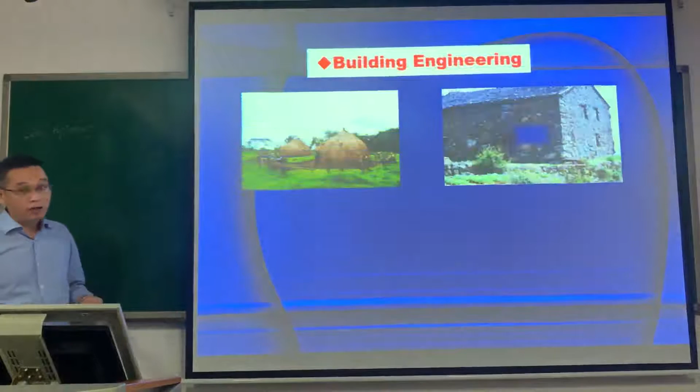Class, at first we need to review what we have learned last time. Last class, we learned two questions. The first one, we learned what civil engineering is. We saw a lot of pictures about buildings, building engineering, and the development of building engineering. Then we had something about the bridge.

Bridge engineering, road engineering, and hydraulic engineering all belong to civil engineering. From these kinds of structures, we can find many different civil engineering materials. In these materials, we find aggregates, cement, concrete, steel, and asphalt.

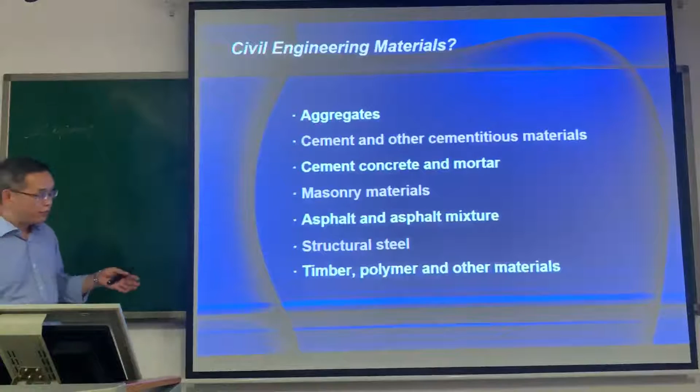For these civil engineering materials, the first one we learned about is cement. Cement is the most widely used material in civil engineering, because if we want to build a house, or construct a road, a bridge, or a dam, we need to use this material. This is cement, the most widely used in civil engineering.

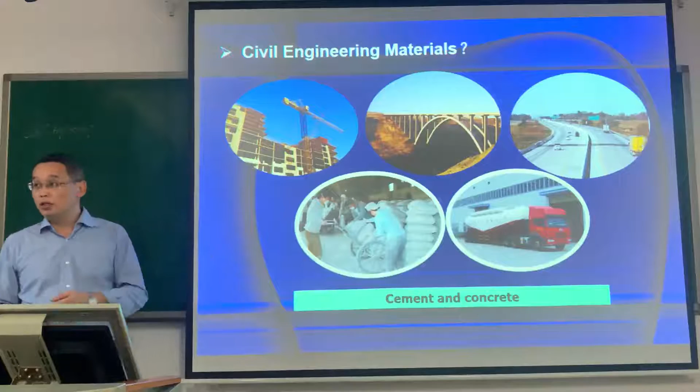The second is the aggregate. Aggregate may consist of two kinds. The first one comes from nature, so we call it natural aggregate. The second one is man-made aggregate. We can also divide aggregate into two kinds: the first is coarse aggregate, and this one belongs to fine aggregate. The function of these two kinds of aggregate is different.

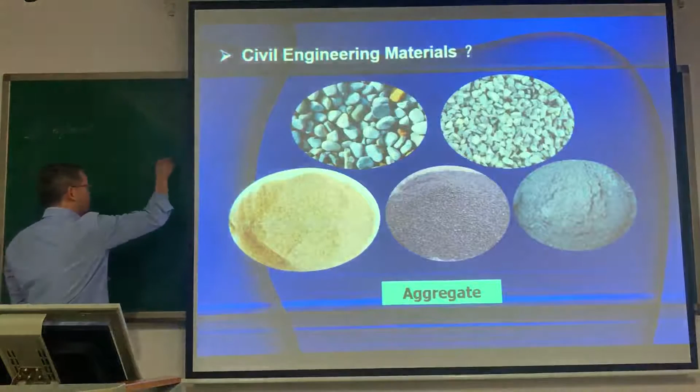The coarse aggregate is the skeleton, the skeleton or frame of the concrete. And the fine aggregate is for the density of the concrete.

The amount of aggregate is the biggest. We use cement concrete for houses and asphalt concrete for roads. In cement concrete or asphalt concrete, the percentage, dosage, or content of aggregate is the biggest. In cement concrete, maybe 80 or 90% of the material is aggregate. So the amount of aggregate is the biggest.

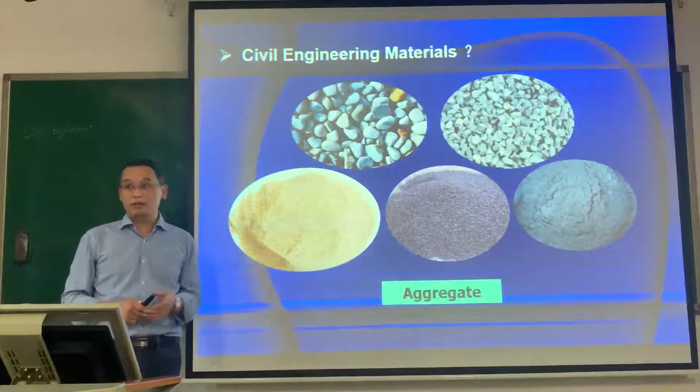Then for steel, it was invented only about 200 years ago, but it is very important for the size, the performance, and the lifespan of the structure. In modern times, it is always used with cement concrete, as in reinforced concrete.

Then there is asphalt and asphalt concrete. The application of asphalt and asphalt concrete is widening now. We can use asphalt concrete to construct roads, and we can use asphalt for the waterproofing of structures or roads. Asphalt has two kinds of state. The first one is the solid one.

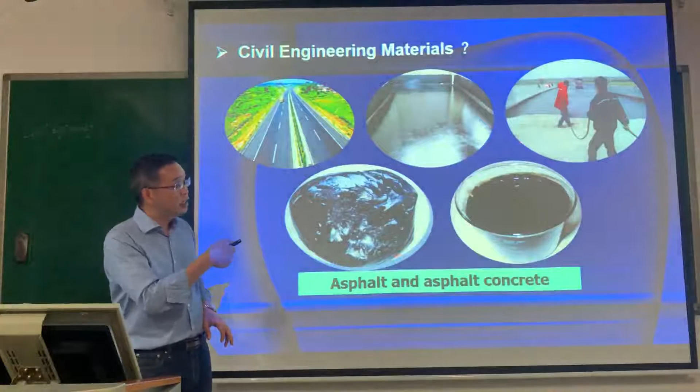And this is the liquid one. Liquid asphalt is mainly for the waterproofing of structures, and solid asphalt is mainly for asphalt concrete for roads. So this is what we learned last time, two questions.

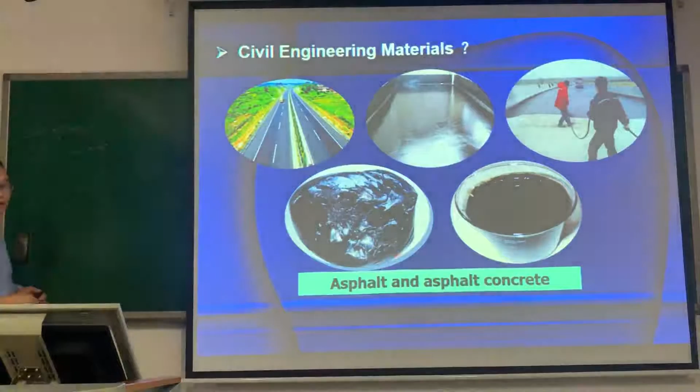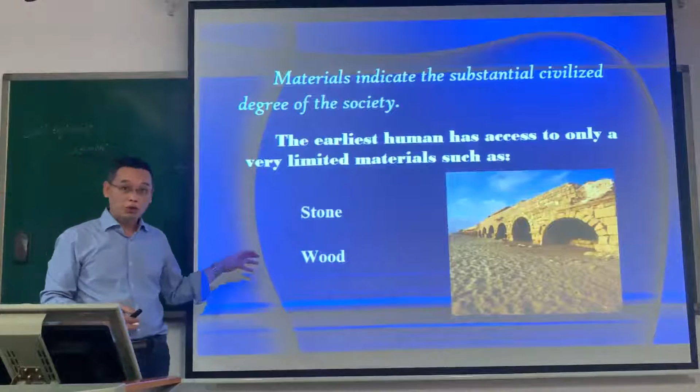Then we learned about the history of materials and how they developed. Stone and wood both belong to natural materials. In ancient times, if we wanted to build a house or construct a road, we needed to use these natural materials. Now we can use modern materials, including concrete and steel. The history of concrete and steel is only about 200 years.

And for the natural materials such as the stone, the wood, and then for some man-made materials such as the bricks, the history of the bricks is about 2,000 years. And for the concrete and steel, it's just 200 years.

And we can consider that the application of these kinds of materials will be very, very long. Maybe several hundred years later, maybe 2,000 years later, we all need to use these kinds of materials for the civil engineering structures. Okay, and the glass and the fiber in the modern era, these kinds of materials make the structure more strengthened, more comfortable, and the life of the structure is also...

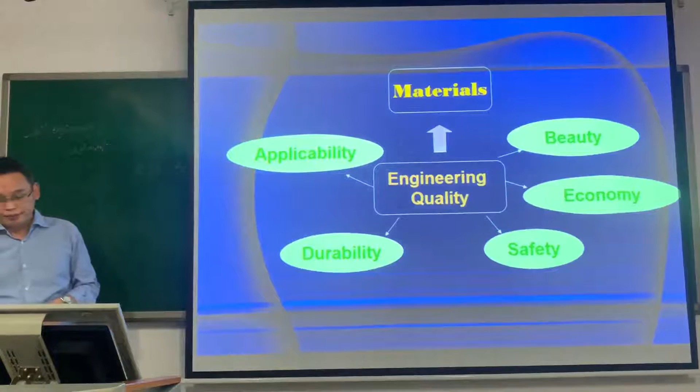If a kind of material is popular for us, it is most important that this kind of material can be used conveniently. So this is about the applicability. So there are some new materials, new technologies for them. And for the definition and classification, we have mentioned last time.

We can divide them by the chemical compounds, by the function, and by the location. If by the chemical compound, we can divide the materials into three types. The first one is inorganic. The second one is organic. The third one is composite.

What kinds of materials belong to the inorganic materials? Such as the glass, the steel, cement, concrete, rocks, also the aggregates, bricks, yes. They all belong to the inorganic materials.

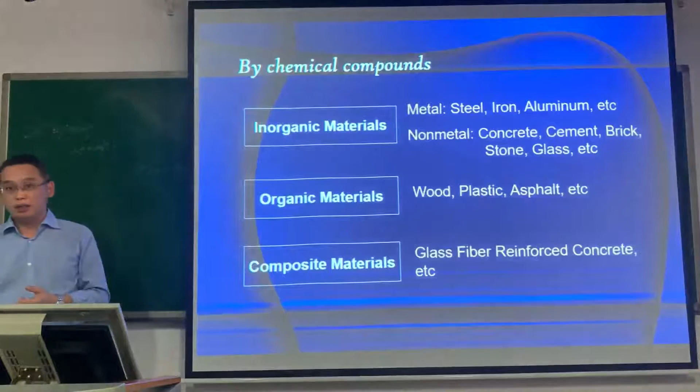And what kind of materials belong to the organic materials? Such as the wood, asphalt, rubber, plastic, yes, plastic. And then the composite materials consist of two kinds of materials. So this is the classification of the materials by the chemical compounds. And then we can get the classification of the materials by function.

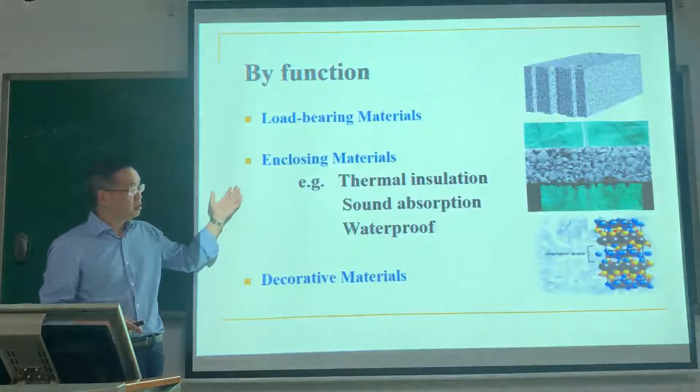The first one is the load bearing materials. In our classroom, the beam, the column, the slab, the floor, they all belong to the load bearing materials. And in this class, there are some enclosing materials, also decorative materials, such as the tile, the painting, they all belong to the decorative materials, also enclosing materials. And by the location, there are different kinds of materials we can divide.

So, for the history and the trends, we have just remembered. But the most important thing I want to emphasize is about the steel and the concrete. We have just learned that the history of the steel and the concrete is very short, just 200 years. And in the future, we need to use these kinds of materials for a long time.

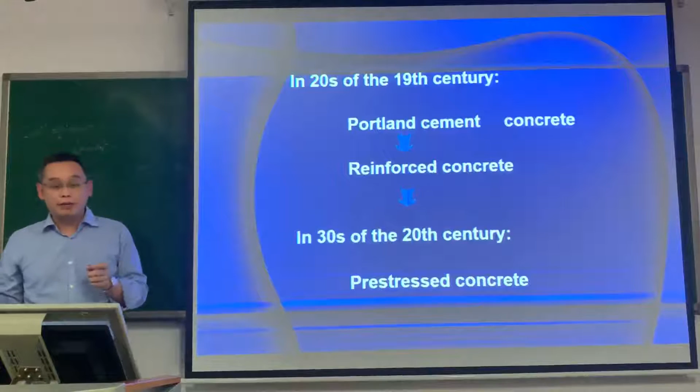And for the trend, what we need in our future, the materials need to develop like this trend. The first one, most important, is high performance, including the strength, the life, the durability, and then multifunction, environmental protection, and energy saving. So this is the trend we need to emphasize in the future.

So from now on, we have found that there are three kinds of materials developed in our history. The first one is the man-made materials, just like the bricks. The second one is steel. The third one is the concrete, including the cement concrete, asphalt concrete, and so on.

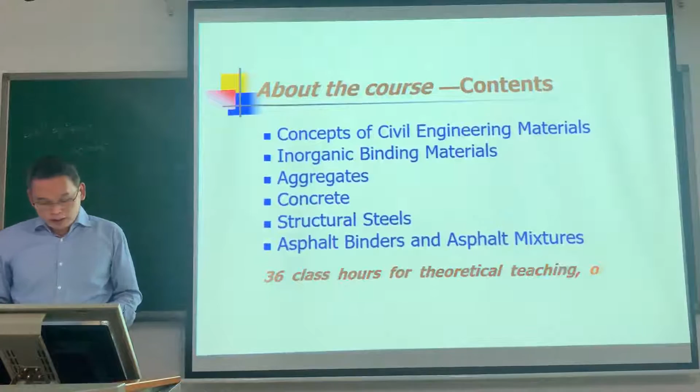So, what should we study? The most important are these three parts. The first one is about the properties of the materials. The second one is about the application of the materials. And then maybe we need to do something about the modification or the improvement of these kinds of materials.

We get to meet the raw materials, production, composition, structure, standards, tests, and so on. And in the application, we get the specifications, such as for the tests, the materials, the construction. There are a lot of specifications.

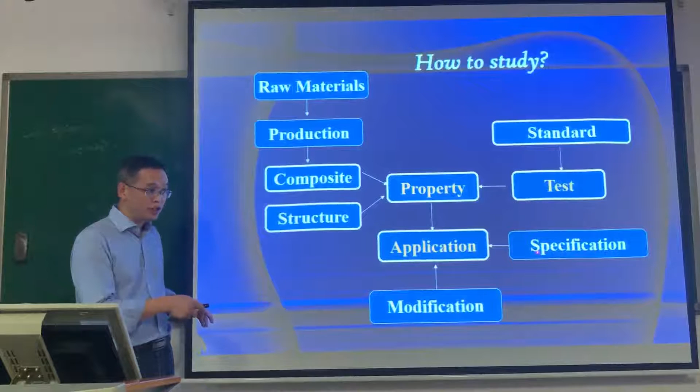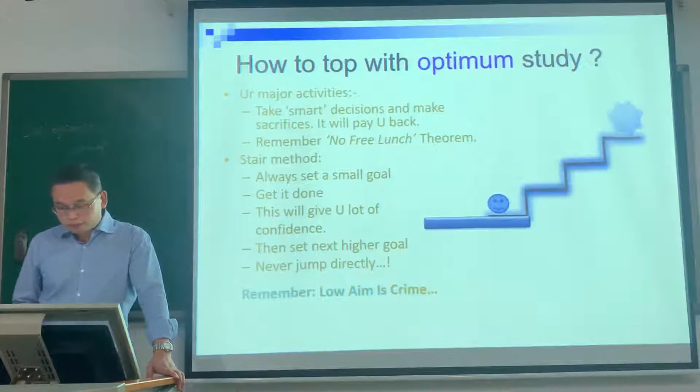Okay, maybe we can get a score at the final. So the most important thing I should emphasize is about the class. Everyone needs to enter the class on time, and then listen, and take part in some discussion. Okay, this is about the introduction of our course.

And then we'll move on to chapter 2. In this chapter, we are studying a lot of concepts about civil engineering materials. It is suitable for the aggregate, also for the cement, also for the asphalt. So these kinds of concepts are all the basic ones.

So in these concepts, the first one we need to know is the physical properties. After we learn the physical properties, we need to study the mechanical properties. In the physical properties, there are several different concepts we need to study. The first one is about the density.

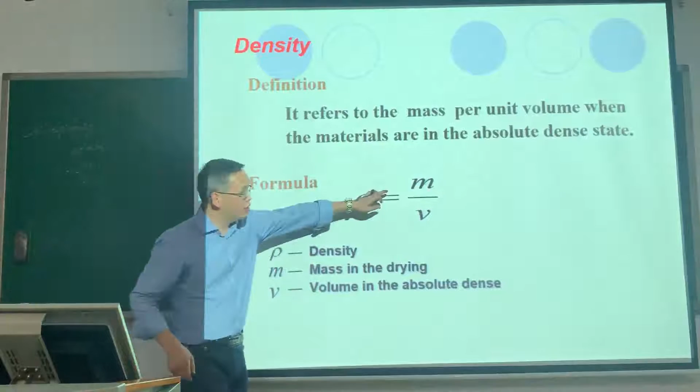So the first one is about density. The formula for density is very simple. For the density of materials, the formula is just like this. It refers to the mass per unit volume.

Per unit volume, when the materials are in the, I need to emphasize this, the state is not the natural state. It must be the absolute dense state. Absolute dense state. Then we can get the density of this kind of material.

But we need to know, for most of the materials, including rock, aggregate, cement, concrete, are they in the absolute dense state? No. Just for example, the aggregate or the rock.

Is it in the absolute dense state? No, there are pores in it. Maybe we can't find it by our eyes, but the pores exist in it. So for this density, it must emphasize the absolute dense state. Absolute.

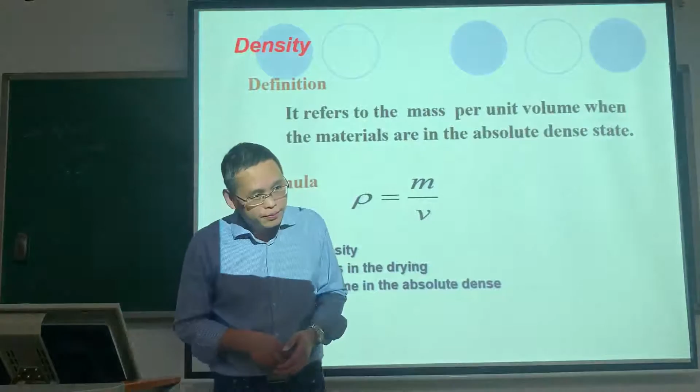If you say absolute density, what is an absolute density? You mean the absolute, there is no pores. Pore, P-O-R-E. Yeah, there is no pore in this kind of material.

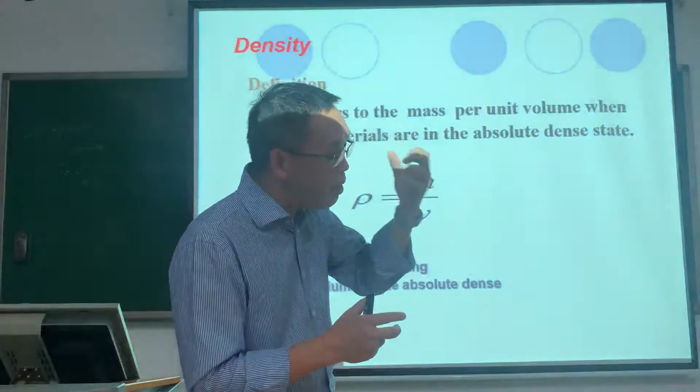We mentioned it, the absolute dense state. For example, this chalk. Is there any pores in it? Yes or no? Yes, there are a lot of pores in it.

If it is absolute dense state, it will be like a rock. What is it consist of? Powder, a lot of powder, and then compress it. But there are a lot of pores still in it. So for most of the materials, there are pores in it.

How about cement? What is cement, do you know something about it? First of all, you need to know what is cement. Cement is a kind of powder, and when we put the water into it, it will react, and after the reaction, the strength of the cement is developed. It will be hardened. So after hardening, is the hardened cement in absolute dense state? No, there are still a lot of cracks and pores.

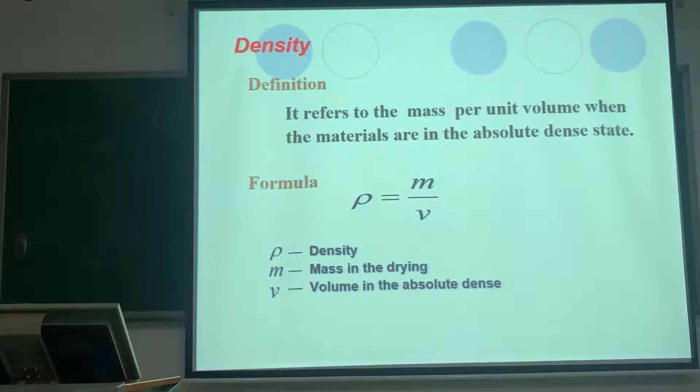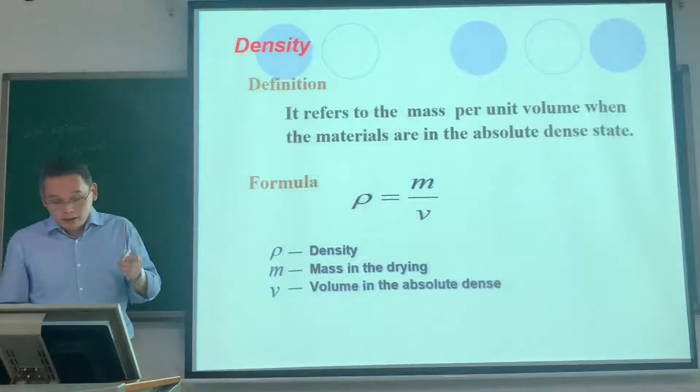So in the nature, most of them are not in the absolute state, especially for our construction materials. So this is the first one for the density. So the second one, if we want to get the absolute dense state, we need to grind it. For example, the chalk consists of powder, we need to grind it more and more finer.

But why do we need to grind it? We need to separate it, to get the pores out of it, and get the absolute dense state of the powder. So this is the first kind of density, we can call it the real density.

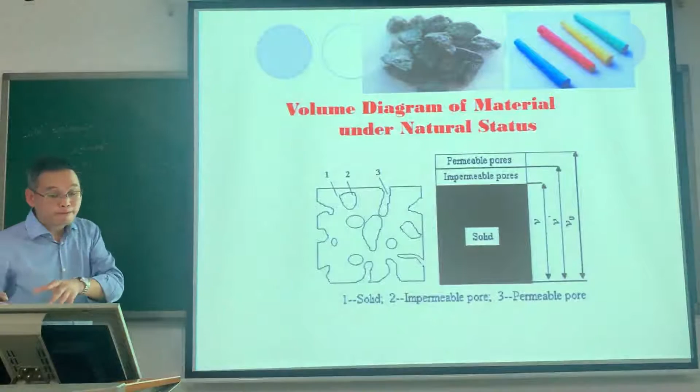If we want to know other kinds of density, we need to know this diagram. In this diagram, maybe this is in the natural state, the volume of a material. In the material, maybe the volume is divided into three parts. The first one is the solid, this is in the absolute dense state.

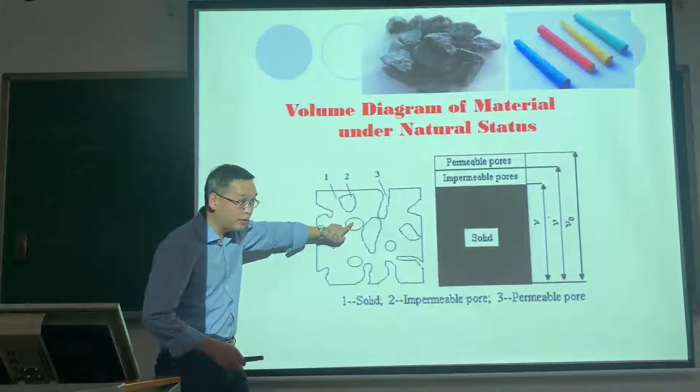However, besides the solid state, there are many pores, and this kind of pores can also be divided into two parts or two kinds. The first one is just like this one, they all belong to the pore, they are the pore: permeable pores. However, for this one, they belong to the impermeable pores. For the permeable pores, it means it contacts with the air. Can it contact with the air? Yes. But for the impermeable pores, it is inside the material.

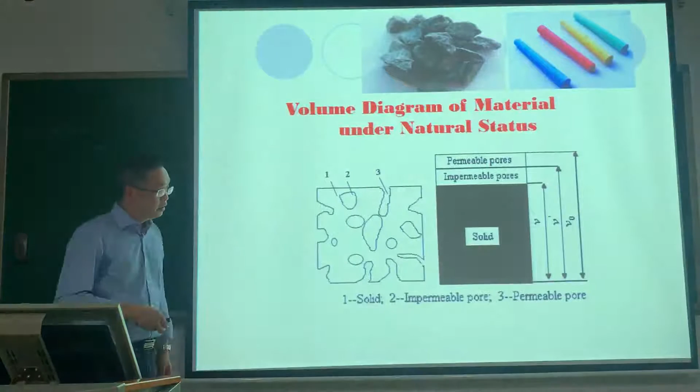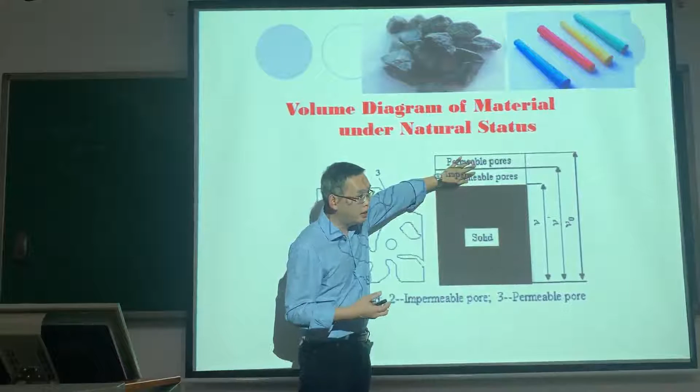So for any kind of materials, we consider the volume of the material consists of three parts: one is the solid, the second one is the impermeable pores, the third one is the permeable pores. If the material is in the absolute dense state, maybe these two parts disappear, and it just has the solid.

So the second density is the apparent density. The apparent density refers to the mass per unit volume, but this volume is different from the absolute dense state volume, it is the volume of the impermeable portion. So for this volume, it has two parts: the first one is the solid volume, the second one is the impermeable porous volume, the volume for the impermeable pores. So this is the second one, the third one.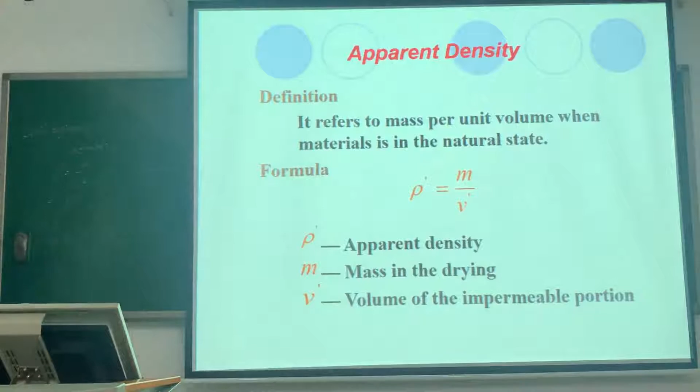So the third one is the bulk density. In civil engineering, this kind of bulk density is the most popular for us. I always use this kind of density for the inspection, for the evaluation, for the test of the material. It means that under natural status, we need to know the volume of the material consists of three parts: the solid part, the impermeable part, and the permeable part. So in natural state, we can get the bulk density of the material.

So now we have studied what is the three kinds of density. I need to give you a question. For the same material, for example, I give you a rock. For the rock, it has these three kinds of density. What is my question? I want to know which one is the biggest.

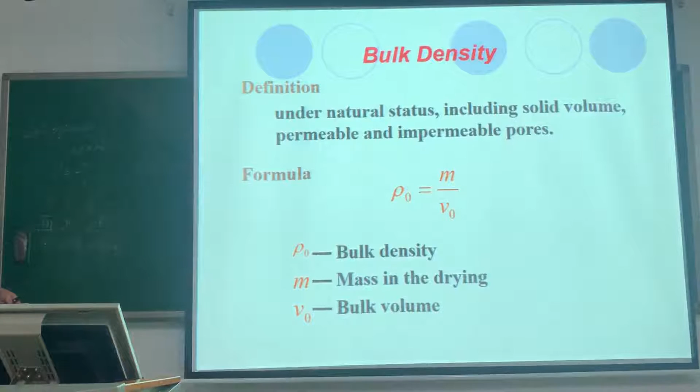So from this side to this side, the density is decreased. So this is bulk density. About these three kinds of density.

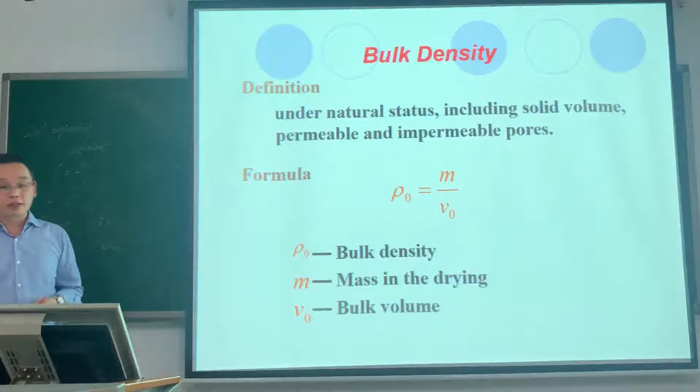Besides these three kinds of density, there is still the loose density. So what is the loose density? We call them the loose grain, for the loose grain materials. What is loose grain materials? Okay, maybe explain it just like this.

If this is a rock, for the volume of this rock, there are three parts: one is the volume of the solid, then the volume of the impermeable pores, and then the third one is the permeable pores. So that's just for one rock.

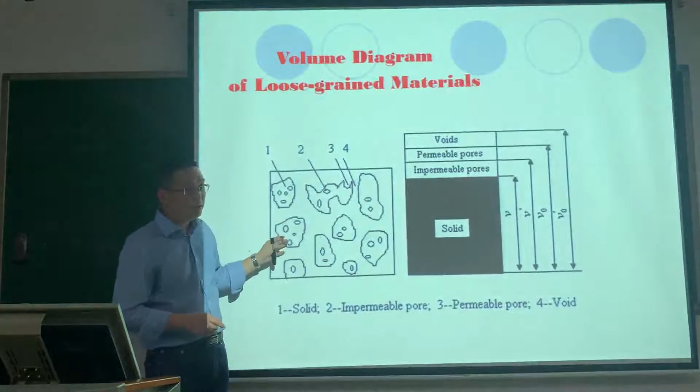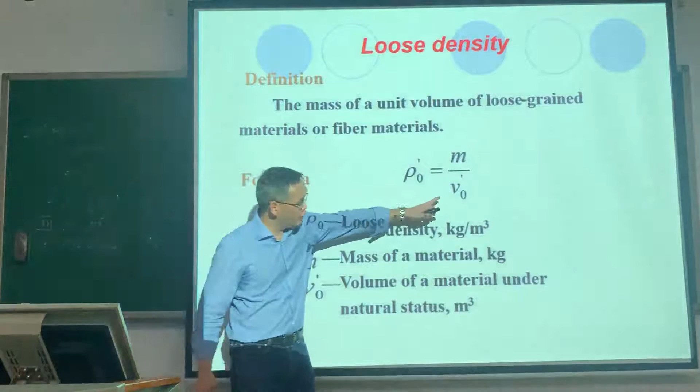So if we consider the materials in this part, put them together, we can get a lot of voids between them, and then we can get the density. We call it the loose density. For this volume, how many parts are in it? Four parts: the first one is the solid part, then the impermeable part, and the permeable part, and void.

So now we get to know what is the loose density. There is a question I need to mention. For the same rock, for the same kind of rock, we have just learned that for the first three kinds of density, this one is the biggest and this one is the smallest. So my question is, when the loose density is compared with these three, how about it?

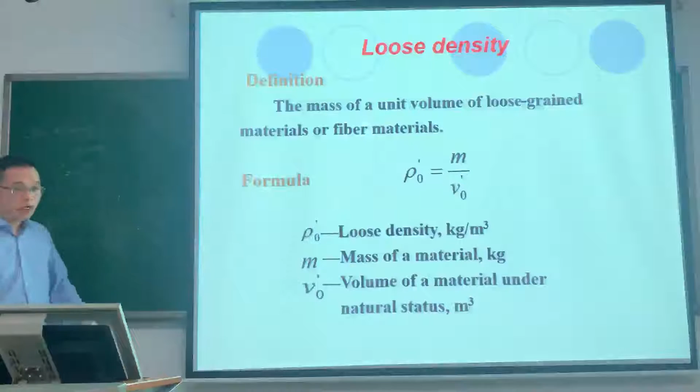Would it be much bigger or smaller? Smaller. It would be much smaller when you compare with these three. So this is about the loose density of them. Okay, we can take a look at all kinds of density: the density, the apparent density, the bulk density, and the loose density. We need to get the difference between them.

This one is about porosity. So what is the porosity? The porosity means the proportion of pore volume to the volume of the material. So this is the porosity.

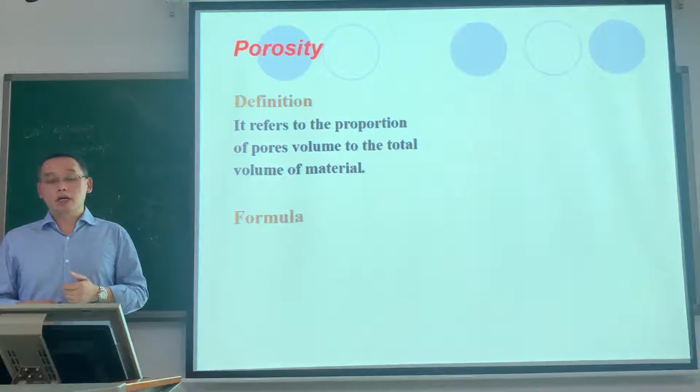From what we have learned, we need to know this porosity consists of two parts: the first one is about the permeable pores, the second one is about the impermeable pores. So what is the formula? This is the porosity. This is the volume - what kind of volume? Absolute dense state, natural state. So this is the relationship between the porosity and volume.

So how about the relationship between the porosity and the density? We find that the porosity is related to the real density. It is also related to this volume, the bulk density.

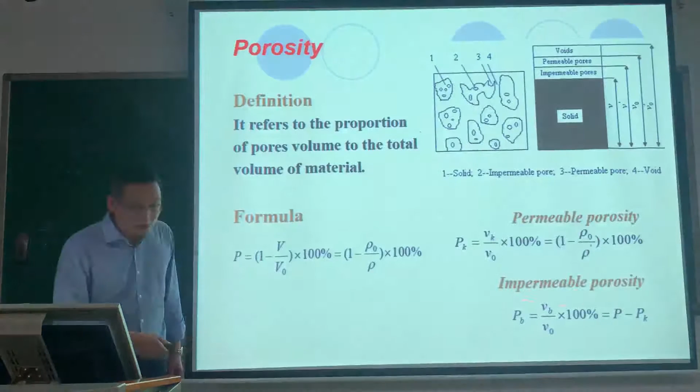But this porosity consists of two parts, I need to just say. The first one is about the permeable porosity, and another one is the impermeable porosity. You do not need to write it.

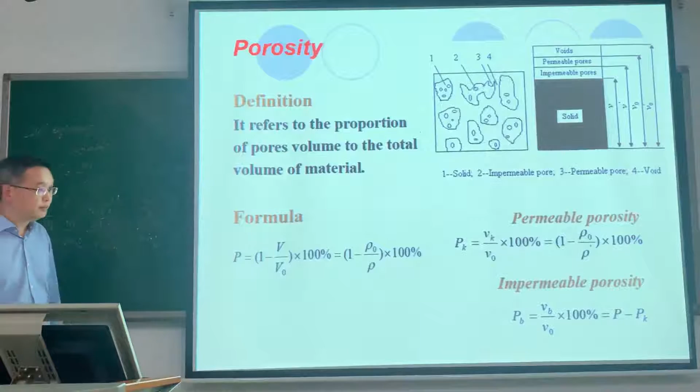This is about the porosity. So we need to get the summary about the pores. Because we have just mentioned, for the civil engineering materials, it is hard for them to get the absolute dense state. This means that there are a lot of pores in this kind of materials. So how do the pores affect the performance of the material? This is the pores and their volume, their influence.

The classification of the pores. The first one is the connected pore, and another one is the closed pore.

What does this mean? For example, I give you a piece of concrete. In this piece of concrete, we have learned there are a lot of pores in it. But in these pores, some of them are connected. How to connect them? By what? By cracks. The cracks connect the pores, so they become connected.

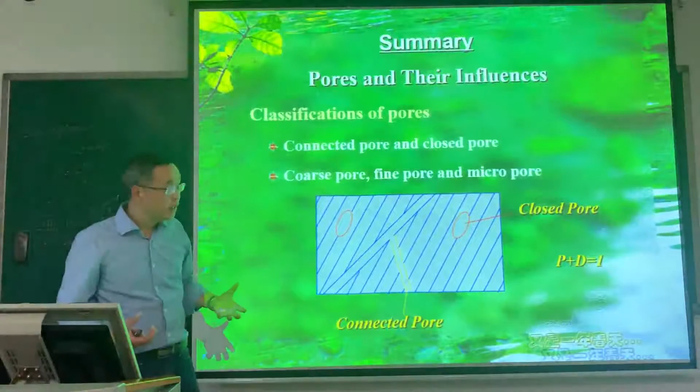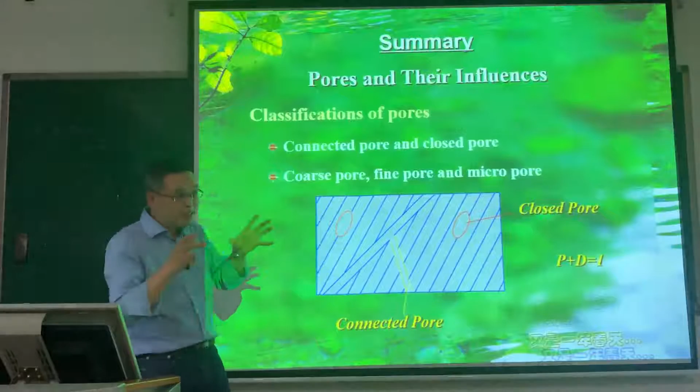We have just studied the physical property. And now in this section, we need to know something about the mechanical property of materials. Maybe when I mention the mechanical property, what can you think about? For example, maybe we can think about the strength, displacement and deformation. Because if we get a load for materials, we don't want deformation to occur, but deformation will happen. So in the mechanical property of materials, there are three concepts we need to know.

The first one is about the strength. The strength is the most important mechanical property for all materials - for wood, for steel, for cement, for concrete, for rock. And then the deformation property, which means how the material changes after loading, under loading. And then it's about the brittleness and toughness - what is brittleness, what is toughness?

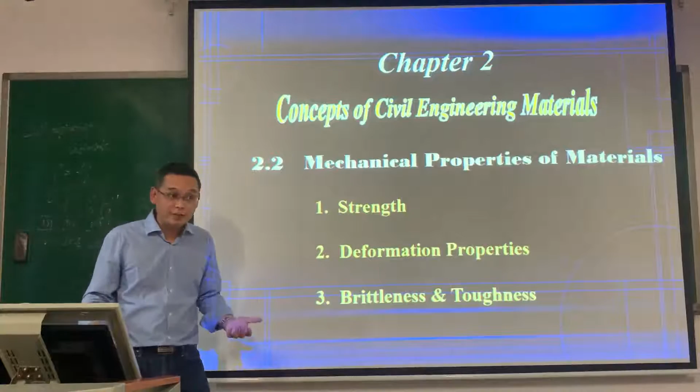The first one is about strength. Do you still remember how to calculate the strength? Do you still remember the formula? This is strength. What is at the bottom of it? Area. What is this? Force. Which means that the force per unit area, we can get the strength. So for strength, it means the capacity of material to resist breakage by the external force. External force means the outside load.

So, the first one we need to know is the definition of strength. It means the capacity of a material to resist breakage by the external load. If the loading is big enough, the material will be broken.

So, for the strength classification, it can be divided into two kinds of strength. The first one is the static strength. So, what is static strength? Maybe next year we need to do some experiments on construction materials. Maybe one of them is the strength test of concrete. The strength of the concrete belongs to the static strength.

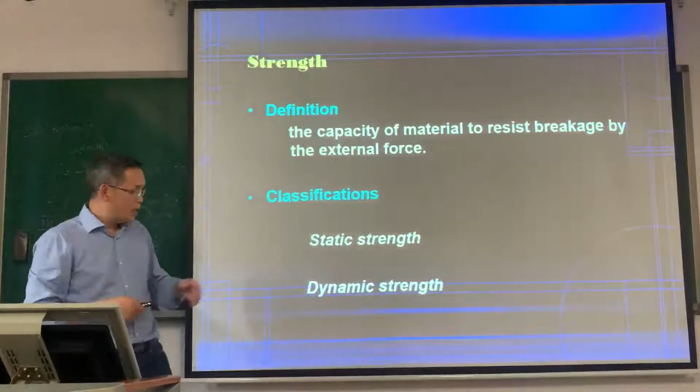And what is the dynamic strength? The dynamic strength means we conduct the load on the material in a very, very short time. But for the static strength, we conduct the load on the specimen slowly. For the dynamic strength, we conduct the load just like this one. This is dynamic strength, this is static strength. So they are different. For the same specimen, they are different.

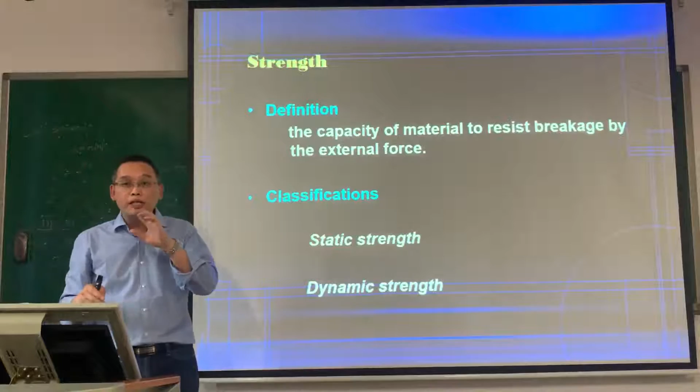So, based on the stress caused by loads, strength is divided into several different types. The first one is compressive strength. We conduct a compressive load, and then we can get a compressive strength. And with tension, we get tensile strength. And then the shear. What is the shear? How is the load conducted? The shear: two specimens.

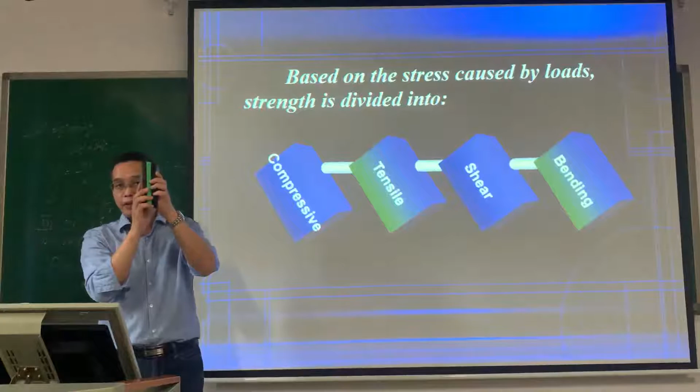For compressive and tensile strength, just one specimen. But for shear, two specimens. This is one specimen, this is another specimen, but there is a contact area between them. Just like this. There is a force, and then to make a displacement for them, we can get the shear strength between the area. Friction? You mean friction?

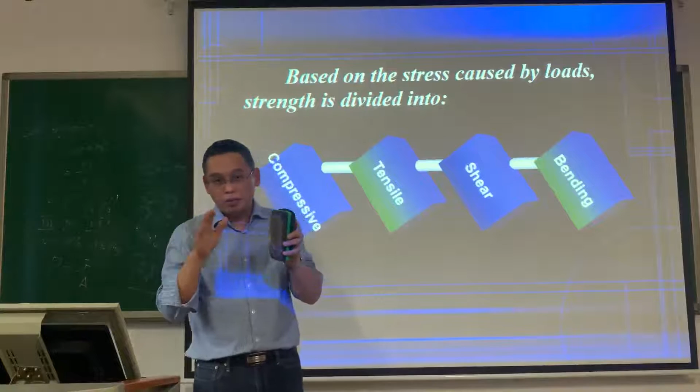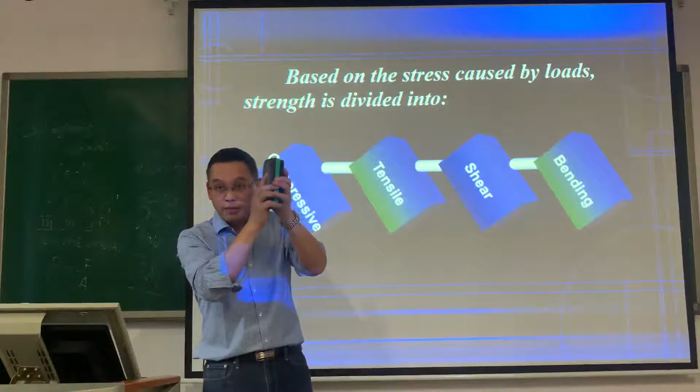No, this is not friction. Friction is like this. But for the specimen, maybe I just made a mistake. This is just one specimen, but the forces are not in the same line. This is the force like this, and the force like this. They are not in the same line. And then the specimen needs to be split, just like splitting. So we get shear stress.

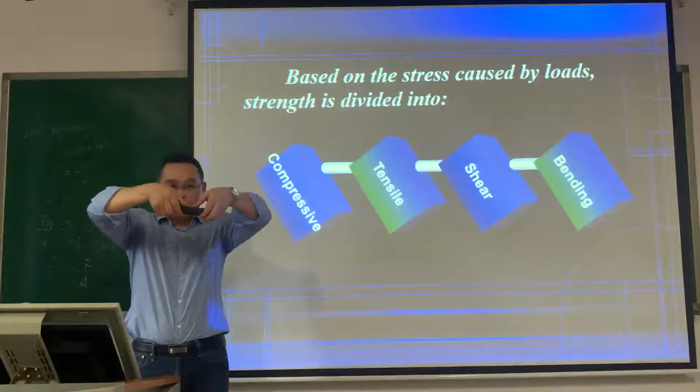And then, if we put a force at the center of the specimen, it will bend, so we get bending stress. So there is another question we need to think about. For the same kind of material, for example concrete, the beam is constructed by concrete. For this beam, it has its compressive strength, its tensile strength, its shear strength, and its bending strength.

For the same kind of concrete, these four kinds of strengths are different. For the concrete, which kind of strength is the biggest? Tension? No. The tension is much lower. Which one is the biggest? Compressive. This is the most important advantage of concrete. The compressive strength is biggest.

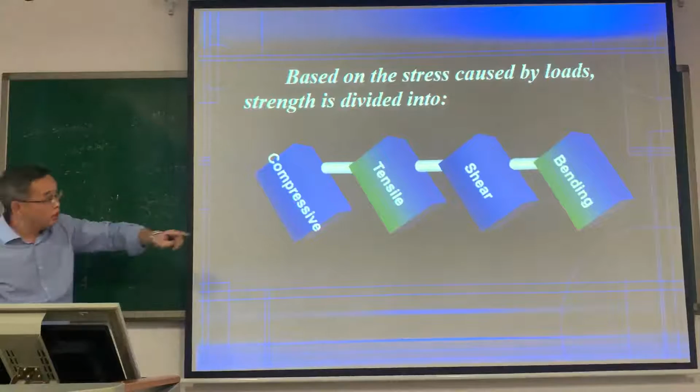For example, for one kind of concrete, the compressive strength may be 50. But for the same concrete, the tensile strength is just 5. So it is much smaller than the compressive. But for steel, the tensile strength is very, very high.

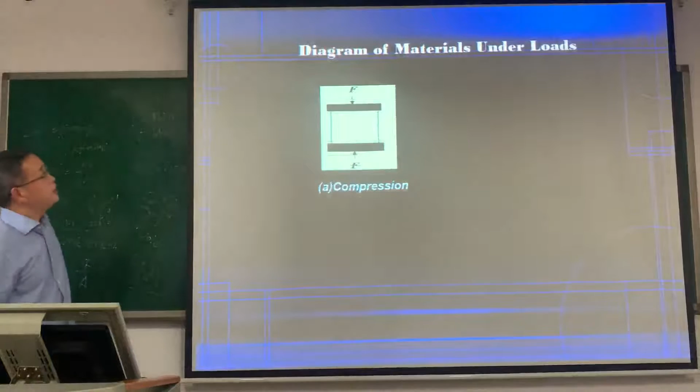So this is the diagram of materials under load. The first one is compression. Under compression, we can get its compressive strength. We need to know how much the load is and the area. And then for tension, the tensile strength, and this is bending.

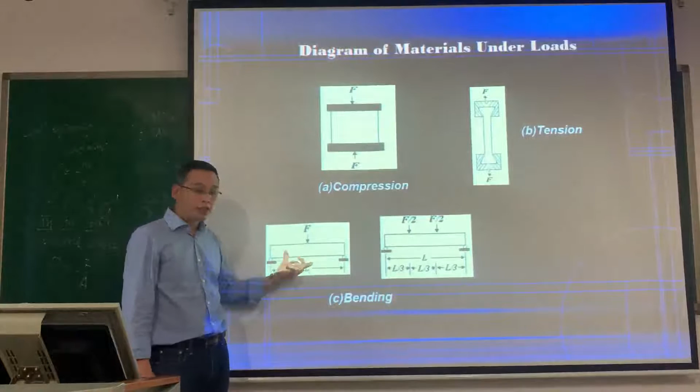This is bending. We have two kinds of methods to test the bending strength of the material. The first one, we put the force at the center of the specimen, and we can get its bending strength. And then we divide the force into two parts.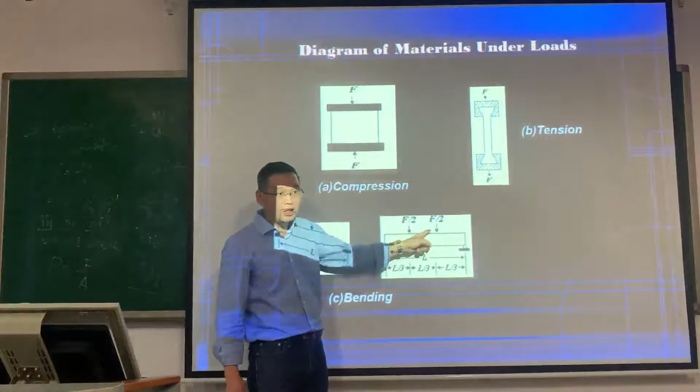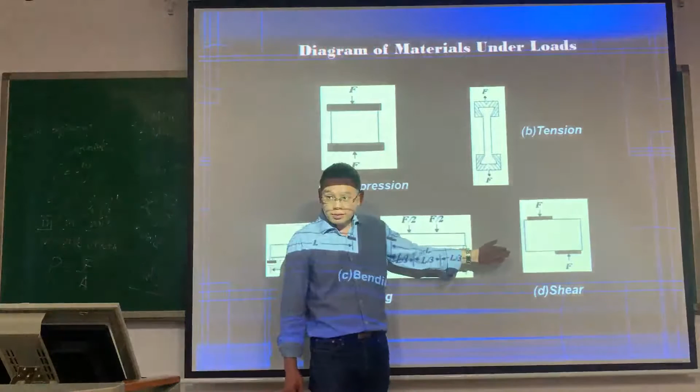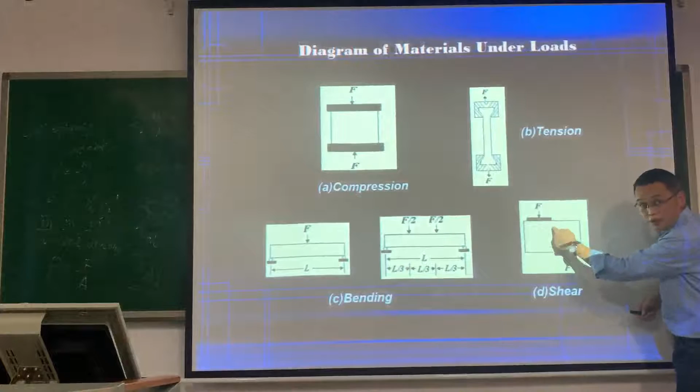And the place where we apply the load, the force, is also different. Maybe we divide the specimen into three parts, and then put the force at this section. Okay, this is shear. This is the specimen and the force. But they are not in the same line. If they are in the same line, it will become compression. So the shear will act at this section. So this is about strength and the different kinds of strength.

So, what is the strength grade? For example, for cement, we need to have different strength grades. First I need to explain what the strength grade of cement is. It's just some numbers: 32.5, 42.5, 52.5. So what does this number mean?

The strength. What kind of strength? We have just talked about cement and concrete. Compressive strength. But what do we know about the strength of cement or concrete? After we mix the cement with the water, is there any strength? Just after mixing, no, it's flowing. So there is no strength. Where does the strength come from? It comes from the reaction of cement and water. But it needs time.

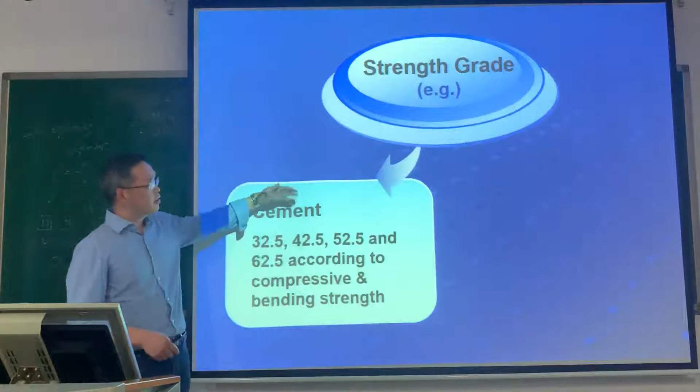So another question: why do we need these different cement grades? Just for the application of the cement. If we just want to build a house for myself, that's one. Another is a high building. They both use cement, but the cement is different. If the building is high, the strength of the cement must be higher. So for different construction structures, we divide cement into different grades, as well as concrete.

If we want to construct a bridge, a road, or a building, the strength of the concrete for these three kinds of structure is different. For steel also, the strength is different. So for cement, the number of the strength grade means the compressive strength after 28 days, or 4 weeks. So this is the strength grade of cement. Okay.

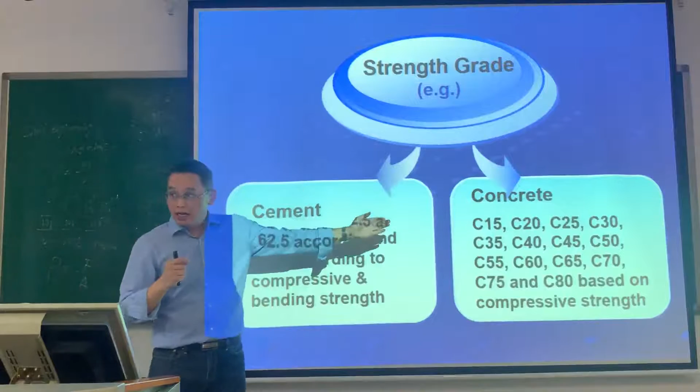Do you get the difference between cement and concrete? Cement is just one kind of product we get from the plant. It is one of the raw materials for concrete. We put the cement, the aggregate, the water, maybe some other admixture together and mix them, and then we get concrete.

So, for the concrete, this is the grade of them: C15, C20, C25, till C80. So what does C mean? What does C mean? Cement? The same as concrete. Yeah. C means concrete. The first means concrete. So what does this number mean?

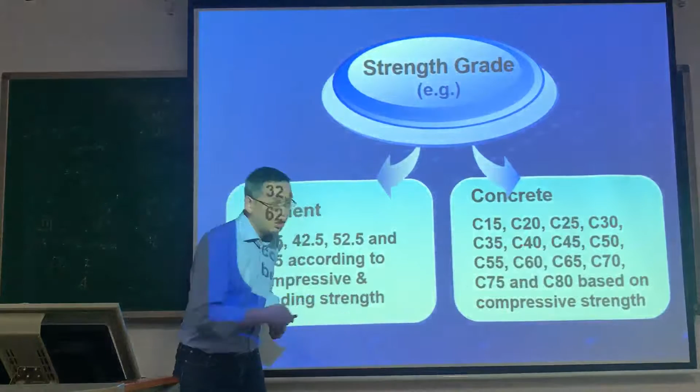It also refers to the compressive strength after 28 days of concrete. This is of cement, yeah? This is of concrete. Concrete. So, this is about the strength grade of the... I wanted to ask. Mhm. So, like, you said for concrete, after 28 days, if it's C20, that's the grade according to the compressive strength.

But my question is, what is that figure dependent on? What is what? The number? Okay, this number is 32.5. Like the numbers can be increased. Okay, yeah, 32.5, 42.5, 52.5. What is it dependent on? I know I need to make a mixture of cement and water, right? And then I have to put it aside for 28 days. Is that what you said? Then after 28 days, will it just decide on its own?

Is it that when mixing, I need to put an amount of cement for it to be 52.5, or any amount of cement? Do we need an amount of cement that can be 42.5 or 52.5? You mean, do we need a specific amount of cement? Like when you mix the cement with water, after 28 days it's supposed to be at a certain figure for you to know the strength grade, right? Either 32.5, 42.5, 52.5. Yes. But when mixing the cement and the water, are you given specific figures? No. So the cement has to choose on its own.

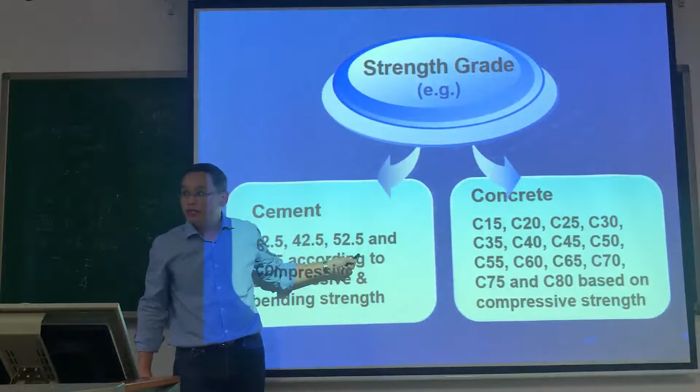Because we need to know, for cement, if the strength grade of cement is 52.5, will the strength of the concrete be bigger than 52.5, or lower than 52.5? If I use 52.5 strength grade cement for the concrete, the strength of the concrete will be lower than 52.5. Why? Okay, I'll explain it to you. Maybe we are studying this part later, but I need to explain that first. Okay?

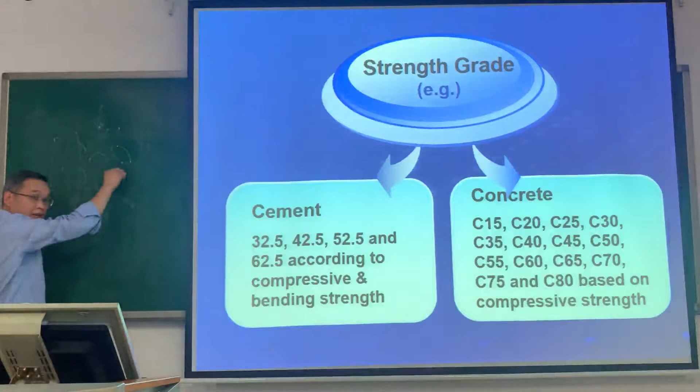There are 3 kinds of breaking. The first one, the crack splits the aggregate. The second one, the cracks develop across the hardened cement paste. The third one, the cracks contact the aggregate surface, develop along the surface of the aggregate, then contact another aggregate, develop along its surface, and then it's broken. Which one?

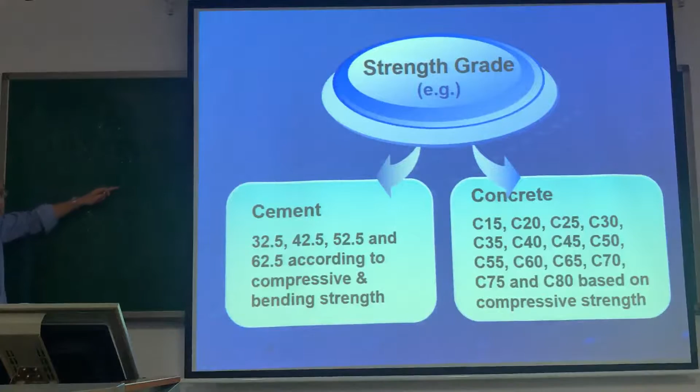The first one is splitting the aggregate. The second one is across the hardened paste, cement paste. The third one is along the surface of the aggregate. Which one? Second one. The third one. Why? Because in this diagram, there are 3 kinds of splits in it.

The first split is what? The split of aggregate. If the crack splits the aggregate, it means that the aggregate is broken. So the first is the split of aggregate. The second one is the split of hardened cement paste. Where does the split come from? The hardened cement paste. The third one is there.

So for these 3 kinds of splits, which one is the smallest? The aggregate strength, the cement paste strength, or the surface strength? Which one? The third one. Yes, the third one.

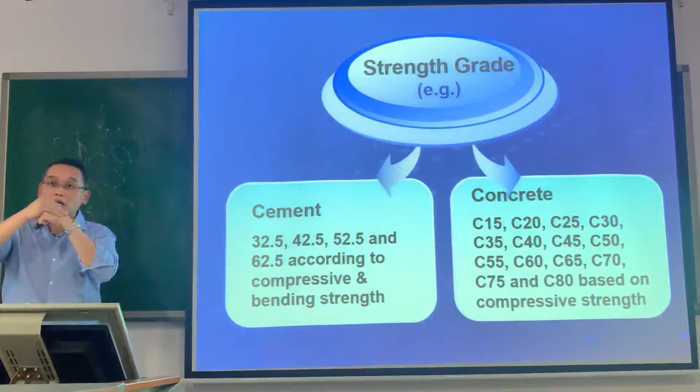Because it is compatible with the aggregate and cement paste. This is the paste, this is the aggregate. The surface between them is much weaker. It's very weak. So the crack will develop there. So for the concrete, the strength will decrease.

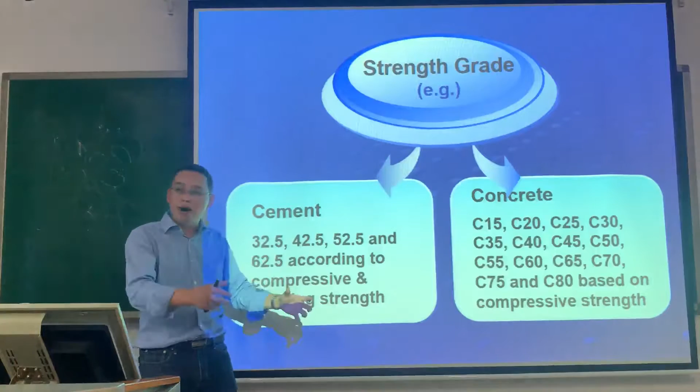This means that if you want to get C40 grade of concrete, you cannot use 32.5 grade cement. If you want to get C40 concrete, you cannot use 32.5. Maybe you just increase the amount of cement. No, it cannot get 40. Do you have some question?

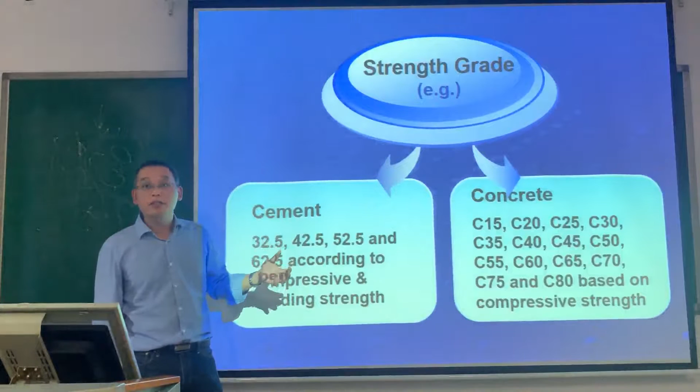So which one do I have to use for C40? I want to make a C40. You mean which grade you need to select? The best, you need to get this one. Use this one. This one maybe is not very good. Lower. Yes, because they are very, very close.

So there is only 32.5 grade cement, but I need C80. So how can I make it? You want to get C80? First you need to use this one. And then you need to use a lot of admixture, like silica powder, plasticizer, and hardening admixture, if you want to get it so high.

Some engineers said admixture is not good for concrete. If I use admixture with concrete, after some years the concrete will crack and fail. You mean that after some years, the admixture harms the concrete? No, it is not harmful. It relates to the durability of concrete. So if you choose one or two admixtures, you must consider the durability.

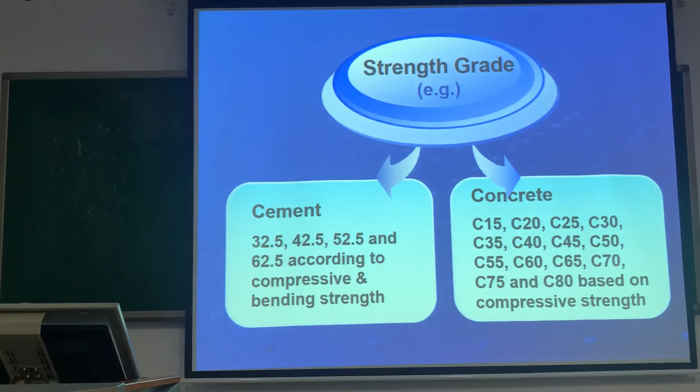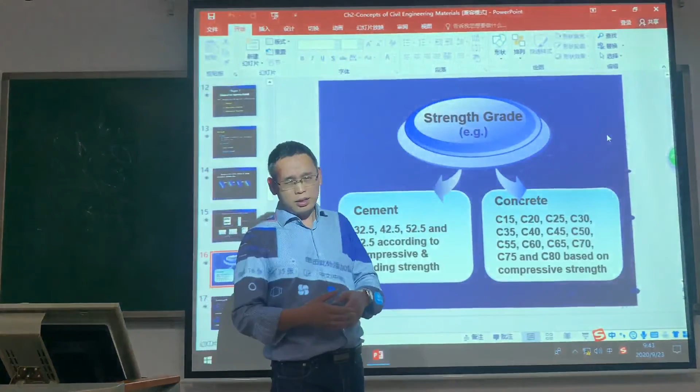Okay. That's all for today. Let's break. Class is over. This class is very interesting for us. Ready? Okay.